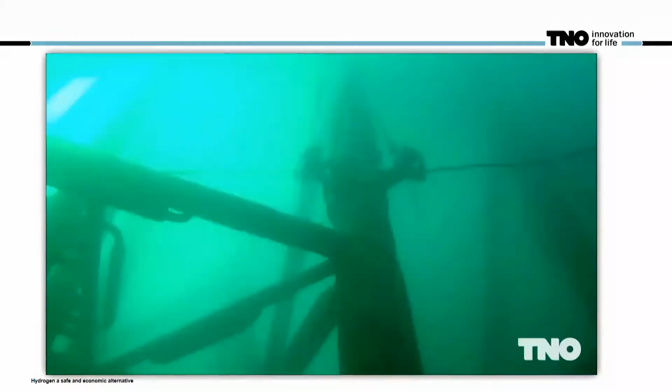Second project is about inspections. Underwater inspections are fairly complicated. They still have to be done. They require a lot of fuel. And so we developed a system with underwater drones. And one of the challenges underwater is communication. Why? Because Wi-Fi underwater, it simply doesn't work.

So we developed a system with sound. And with sound, we can do two things. We can communicate back and forth, and also we can determine the position of these drones. So as you can see on the video, they work together even.

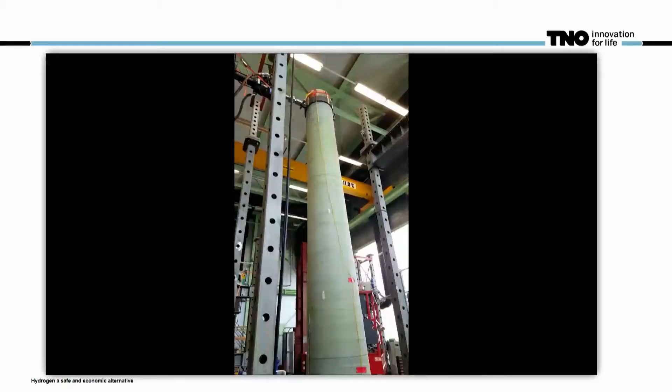But for instance, alternative material for ships. Ships are typically made out of steel. Can we make them out of composites? Maybe. But on the scale we have to do it to get it really feasible, those are still to be seen, but those are some of the challenges we will have.

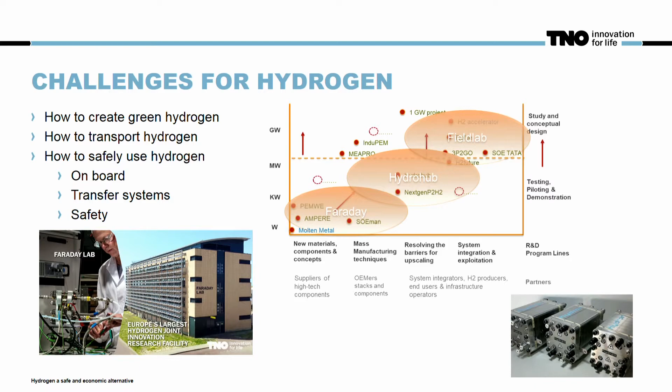Hydrogen. Hydrogen, actually, we can divide the challenges into 3 different areas. First of all, how do we make hydrogen? Right now, hydrogen is made out of natural gas. It's not green at all. But we would like to go to a green hydrogen. And then we have the challenges of, okay, how do we store hydrogen on board of ships? How do we transfer it? And how do we do this in a safe manner?

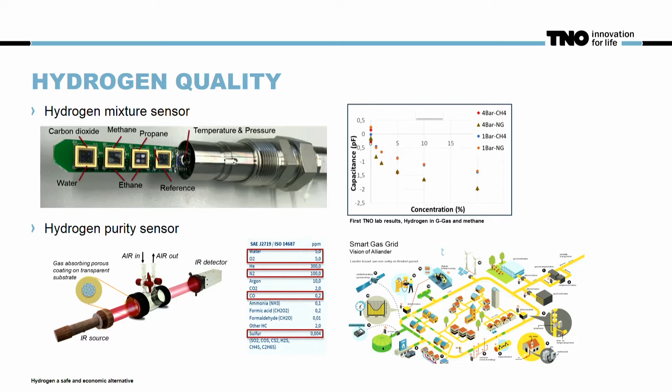Hydrogen quality. So the first one is big scale. This is small scale. How do we measure? Because everybody thinks hydrogen is hydrogen. No, it isn't. It's contaminated. So you have to measure it. How good is this hydrogen? So in order to be able to use it, for instance, for fuel cells. So there's a lot of things, big scale, small scale, to be done.

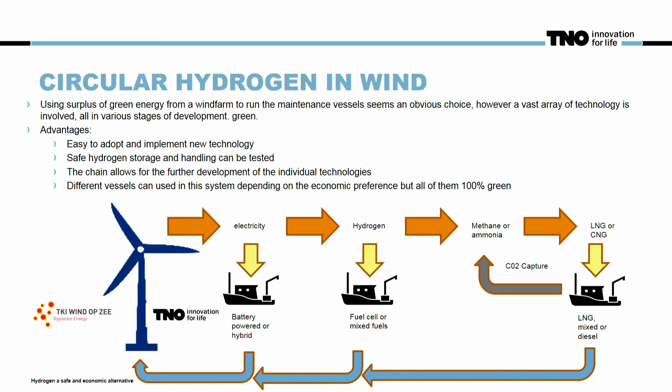Circular hydrogen. How do we make hydrogen out of wind energy? Because that's the only way to make it really environmentally friendly. Now, we can make synthetic fuels out of it. You can make methane out of it, ammonia, together with CO2 capture. A lot of possibilities, but still a lot of work has to be done here.

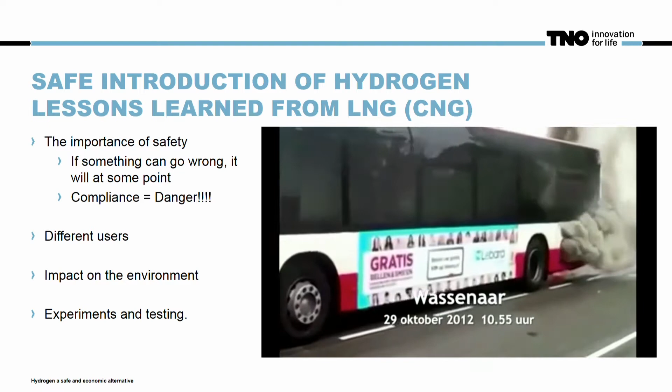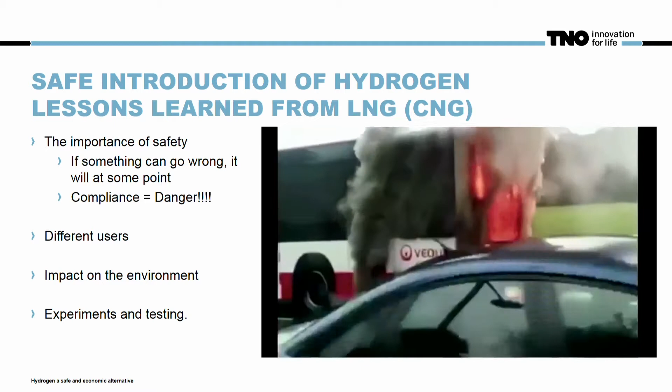And there are some lessons learned from the work on LNG we have done over the years. This movie actually is an accident which happened a few years ago in the Netherlands. It's a CNG bus. And we had a small fire on the bus. And this bus actually complied with all the regulations in the book. The manufacturer, everybody did it according to the book.

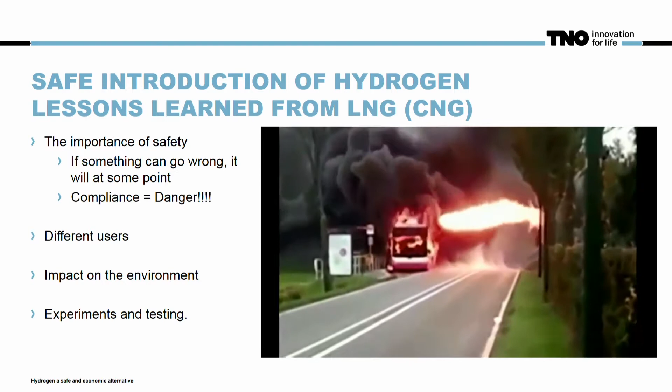And still, as you can see, something went really wrong. And we found out that the safety measures we thought were very good actually were not so good at all. Based on this accident, actually a lot of the regulations have been changed. And unfortunately, probably in the future, we will have to do that as well.

Hydrogen and LNG. We can learn a lot from these two different fuels. Traditional hydrogen was from a fixed place to a fixed place. So everybody thinks, what is the point? Why is it so difficult? But now we are switching to different use.

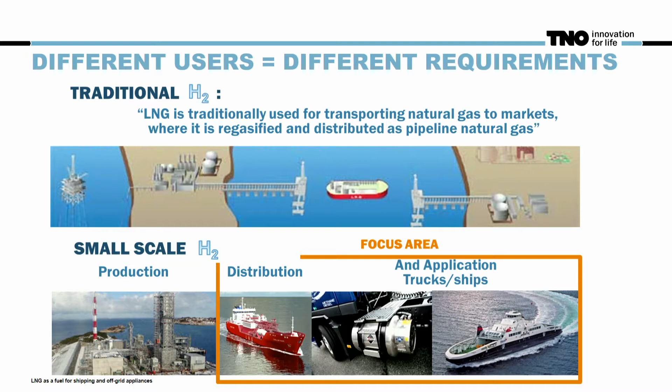Smaller productions, wind turbines, maybe local. Distribution is more difficult. We're going to use it on trucks. We're going to use it on ships. So usage is completely different. Instead of highly specialized people working with hydrogen, we now have people working locally with hydrogen, local fueling stations, which means different requirements and different ways of thinking about it.

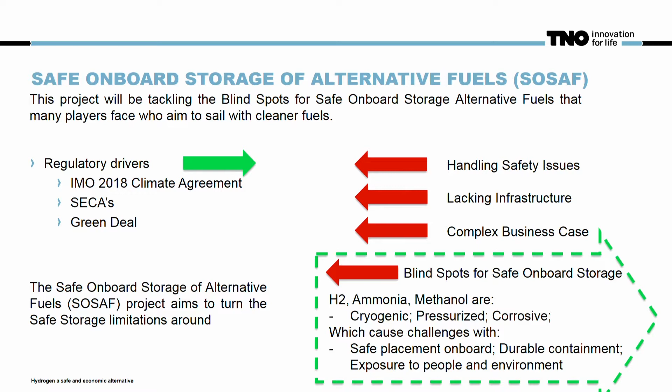We spoke about this one already. IMO regulations, safety issues, different infrastructure, complex business cases. These are all things to take into account. There is no one solution fits all. To make things worse, every ship has a different solution. It's a different usage. That also means in time there will be different solutions for different ships.

And unfortunately, we can already say, look, everything has to be green, everything has to be environmentally friendly, but let's face it, there are costs involved. And somebody has to pay for it. So it has to be economically friendly as well. So different solutions have a different price tag, CAPEX, OPEX, and that has to be taken into account. That means there will be a lot of new technology to be developed and to be introduced. Some of them will be retrofit, some of them will be new.

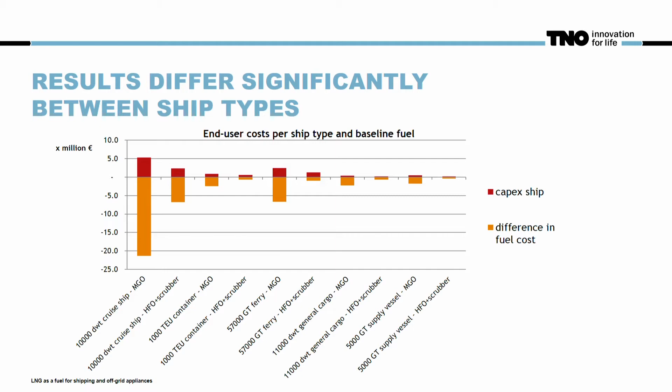And let's start with safety first. Everybody thinks safety is just one thing. The way we look at it at TNO is safety depends on, it can be small, big scale, and it can be high impact. And that depends on what kind of measurements you're going to take. So for instance, if it affects a big area, you will take measures much quicker.

Even with hydrogen, a small incident like in the beginning of this year in Korea has a very big impact on the reputation of hydrogen. A similar accident with LPG would never even have made the newspapers. So there is a very big difference in the scale of safety.

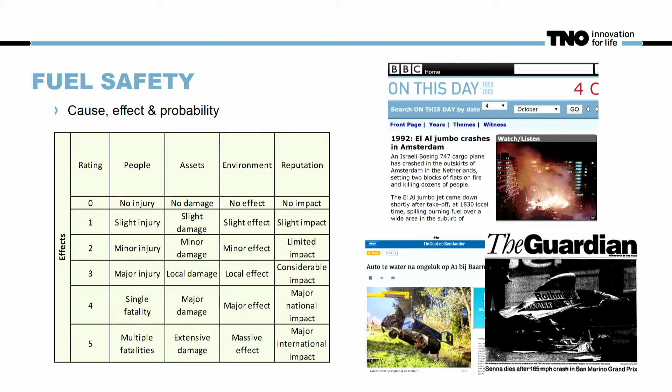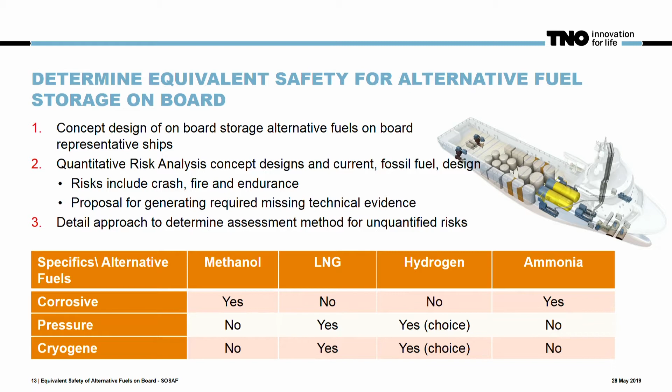Onboard storage. Everybody thinks this is good, this is easy. However, when we look at the different fuels, methanol, LNG, hydrogen, ammonia, we do want to use these fuels instead of heavy fuels or diesel. However, you need space for that, and also the storage conditions are different.

Typically, hydrogen and LNG, they're very similar. Either you talk about high pressure or low temperature. Methanol and ammonia are far more aggressive, difficult to handle, so your safety regulations or requirements are completely different, and different solutions for that.

The role of experimental validation and modeling. When we started with LNG, we suggested, let's run a truck over the hose. Everybody thought, you are crazy, this is never happening. In the meantime, we know better, because this will happen. We found out the hard way that, yes, when you run an LNG fueling station, it will happen at one moment in time. So better test for it.

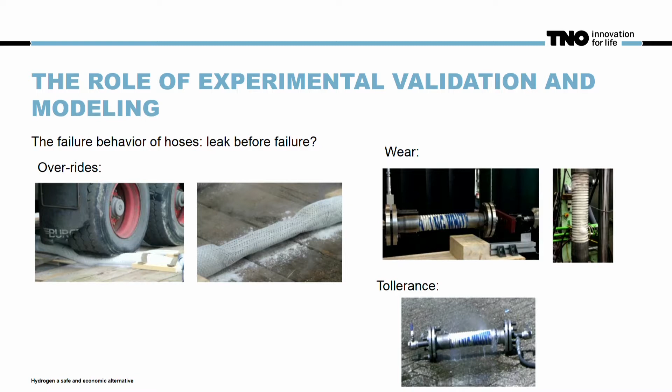The same we do with wear. The same we do with tolerances. So when you implement, let's say, a fueling station on a larger scale, these are the typical things we have to take into account.

Testing of materials, and that becomes more difficult. We talk about, especially for LNG, cryogenic temperatures, minus 160 degrees. Materials do behave completely different, especially when you want to move from steels to composites at that kind of temperature. It has to be investigated. There is not so much known yet about that.

When we go to hydrogen, it's minus 253. Again, different. Also, testing requirements are different. So a lot of material has to be tested.

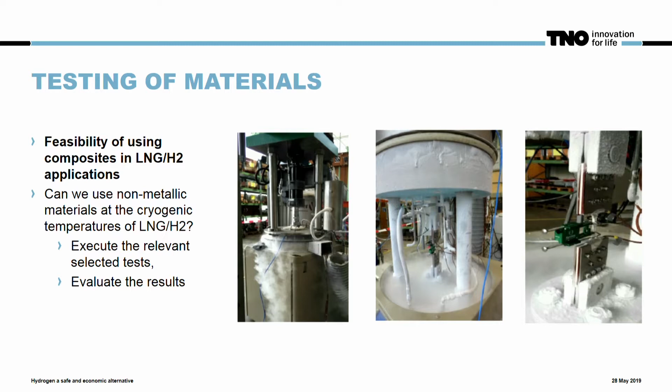And then we, of course, have the testing of the transfer system itself. Typically, these are examples from LNG. When we started with it, this was from a bunkering system to an LNG station. Always the same fixed ship to the same transfer system of the location.

Now we're going to expand that. We're going to use different ships, different locations, different requirements. We're going to do refueling at sea. So that means the usage of the materials and the systems are going to be different.

When you look at the requirements, they are not yet fully there. There's still a lot of discussion. Okay, we're going to test a new transfer system, but what conditions are we going to use? What are the standards? And are these standards correct?

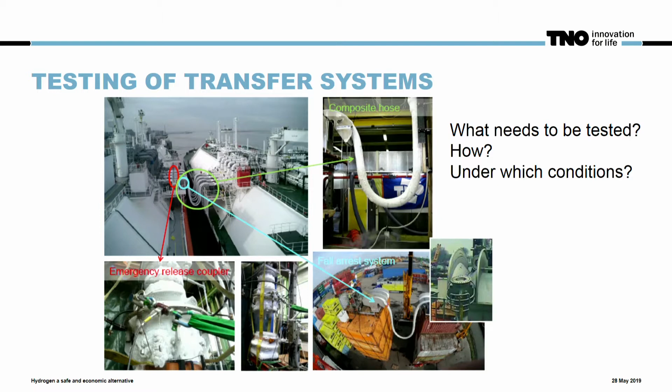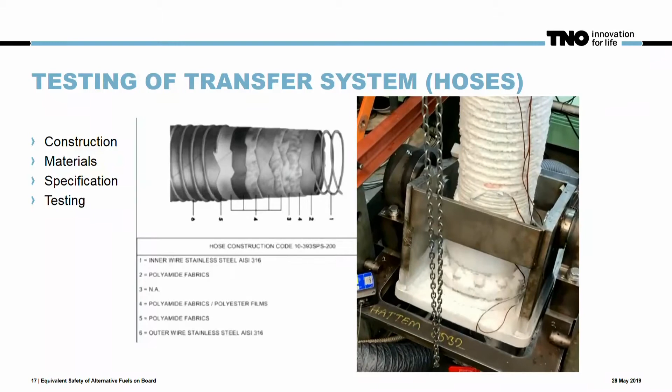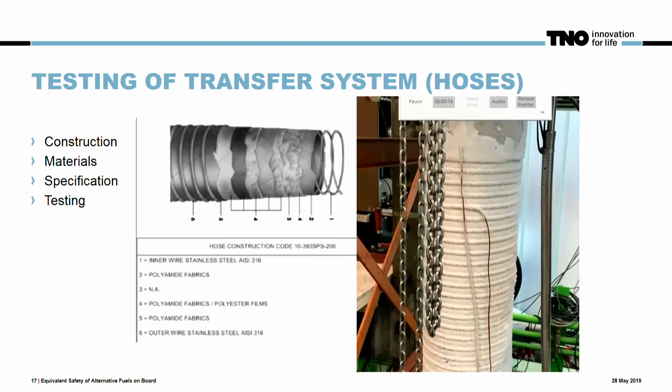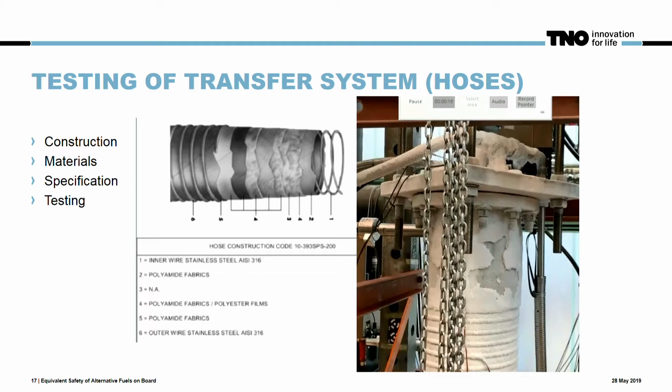Now, some of the examples we started with some time ago with a manufacturer. This was one of the first tests we did on one of the flexible hoses. And of course, the first ones failed. Because when you test these kind of things under cryogenic conditions, things are slightly different. On the drawing board, everything looks okay. When you start testing in real life, things do fail at places where you don't expect them, which is okay when you test things.

Testing of pipes and components. Everybody knows that, for instance, pipes and hoses are rated at a certain pressure. But what is the real pressure? When do they fail? And especially when it's at low temperature. You see here on the picture one of the burst tests we did with the hose at minus 160 degrees. It did cost us a high-speed camera because we did it in a bunker. But it gave us a lot of valuable information. Not so much what is the hose rated to, but when will it actually fail.

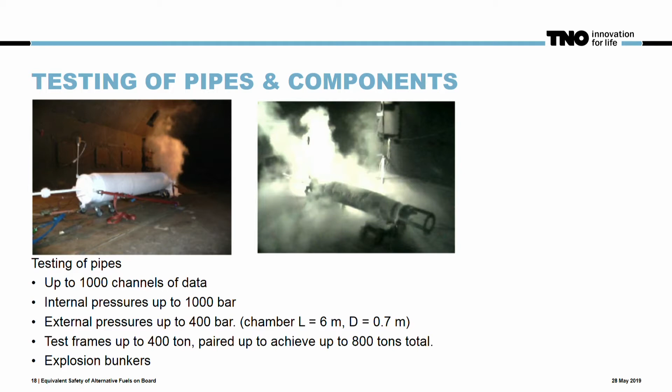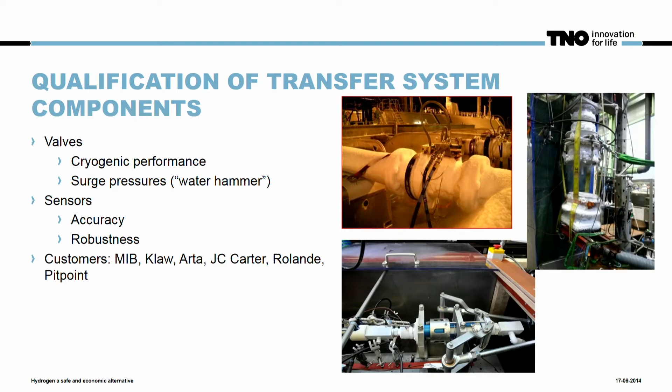Transfer system and components, you do want to have everything decoupled when it's needed. So also these smaller components, they have to work, have to be tested. And not just one time, also when these components are 10, 15, 20 years old, they still have to work. That also means that the testing requirements are different. There are different operating conditions, different lifetime.

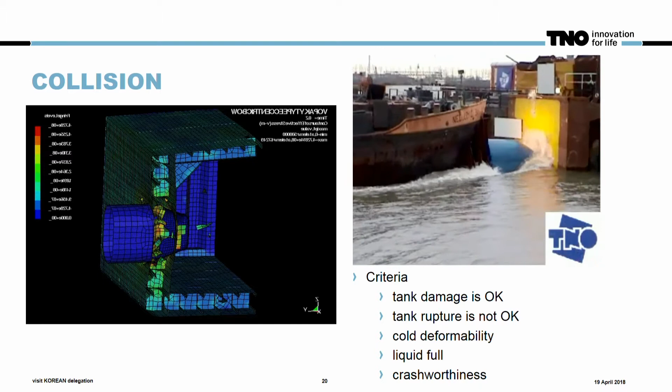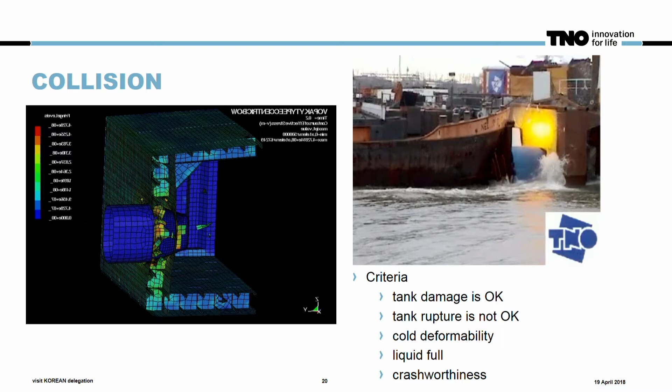And of course, we have to look at the ship itself. No, we do not do a crash test of a ship every day. But we use this information to do the calculations and to check if the calculations are correct. And that gives us a lot of valuable information. In this particular case, we looked at rupture. If the tank is damaged, that's okay, but it should not rupture, it should not break. And of course, we have to do that at low temperature, different levels of liquid, so we look at crashworthiness.

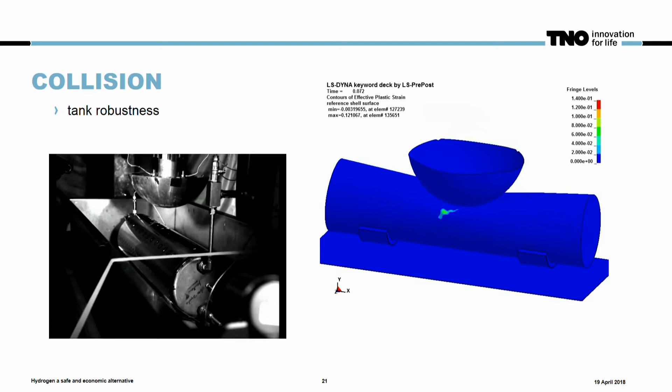This is actually an example. If we would put a tank either on board of a ship or on top of a ship, you do want to know, okay, if something drops on the ship, what will happen? Are my calculations correct? You can see on the picture as the stamp is coming down, the hydrogen, in this case it's actually nitrogen because that's the way we tested it, is coming out. So there's a blow-off valve.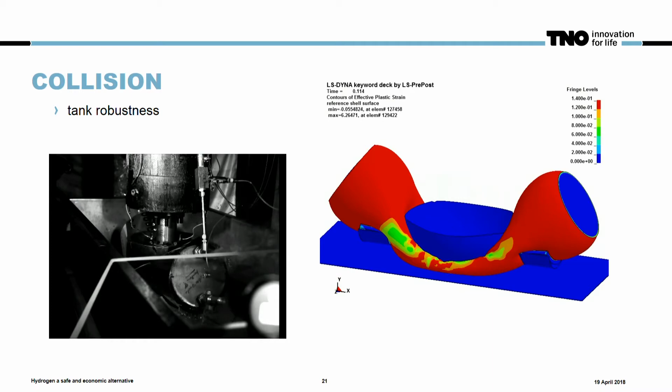So we find out by the calculations, these tanks, even if they are so much deformed, they don't crack. They are heavily damaged, but they stay in one piece. And that means your safety requirements can be done completely different. And you can meet all the safety requirements.

You don't want to do a tensile test at minus 250 degrees surrounded by hydrogen in an office somewhere in the center of Busan, because that's not possible. It's too dangerous. So we're also looking at different ways of testing. One of the things we do want to test, and actually that's why I put a sample of a tank up here, is, for instance, the combination of steel and carbon, steel and composite, because that's probably the future for the tanks. But also over there, a lot of work still has to be done.

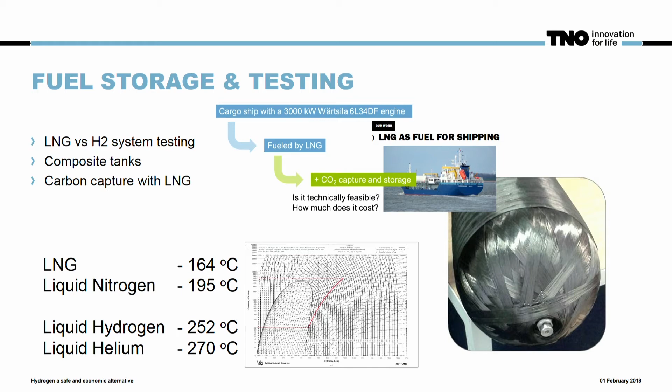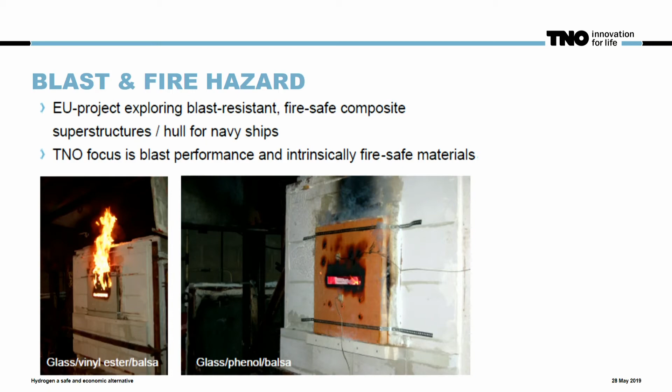We used to do tests for the hull of Navy ships, because if there is an explosion on board of a ship, you don't want the ship to sink, because then you have a lot more difficulties. So it's all about safety and new materials, testing of materials.

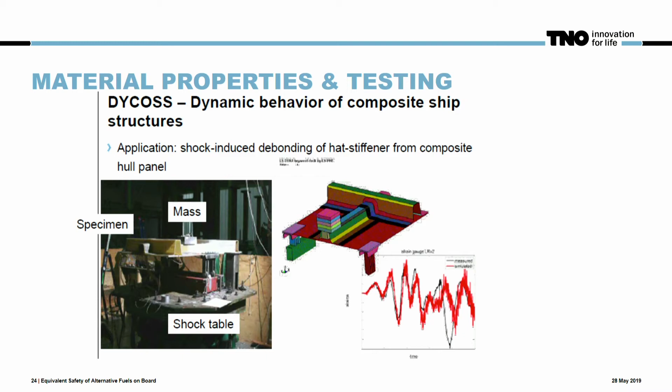Using composites actually brings another challenge, and that is shock. Of steel, we know pretty much how it behaves under shock conditions, when there is an explosion or an accident. With composites, we do not know that much yet. So this is an example where we put a high shock on a composite to see how it behaves. Is it good enough, or do we need different regulations?

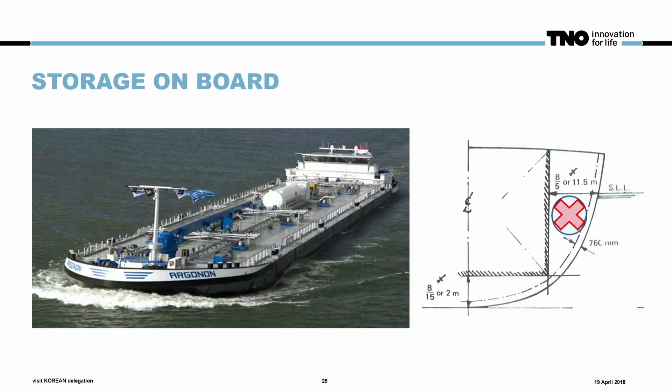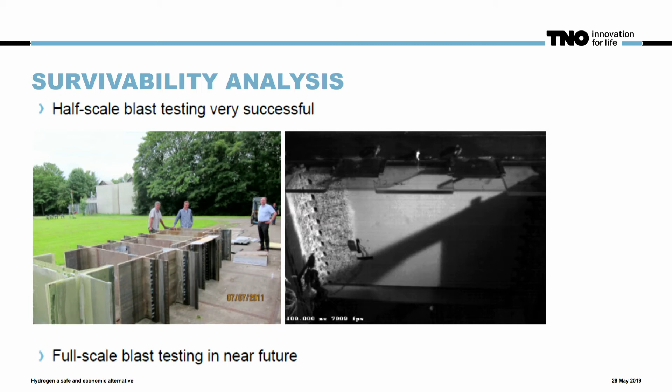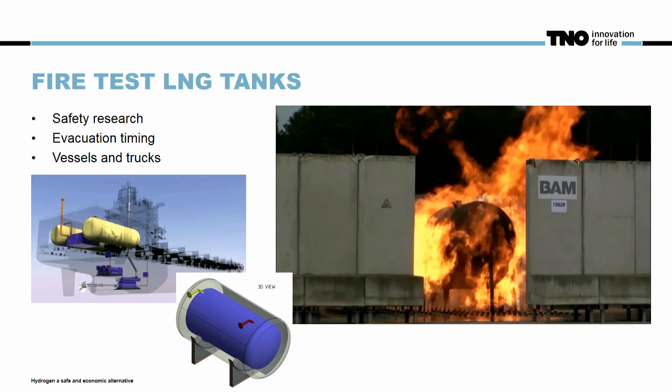The first one, we said, let's use a blow-off valve so that when the temperature increases, the gas can go out safely. And as you can see in this video, nothing happened. We continued for 1.5 hours, still it was safe. So what did we learn? For the safety of the firemen, it was very easy. They have at least 1.5 hours to go on board of a ship, do the evacuation, or evacuate the surroundings to make sure everybody is safe.

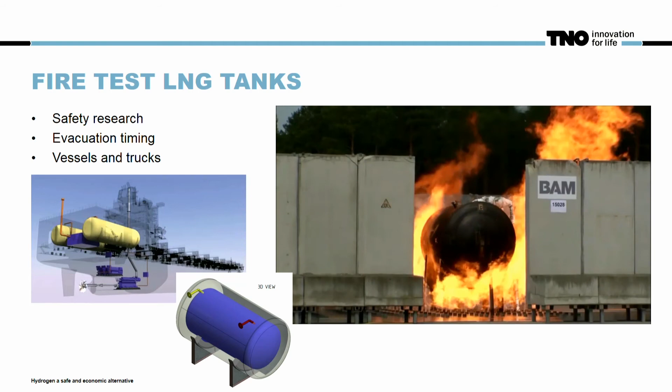We repeated this test twice, one with the blow-off valve closed, and it was still okay. And the third time, we put the tank in the water after, I think, 1 hour. And then it did explode. So that means if a ship is sinking, it does become very dangerous. That gives very valuable information for the firemen: we know 1.5 hours is safe, and when the ship is sinking, better get the hell out of there.

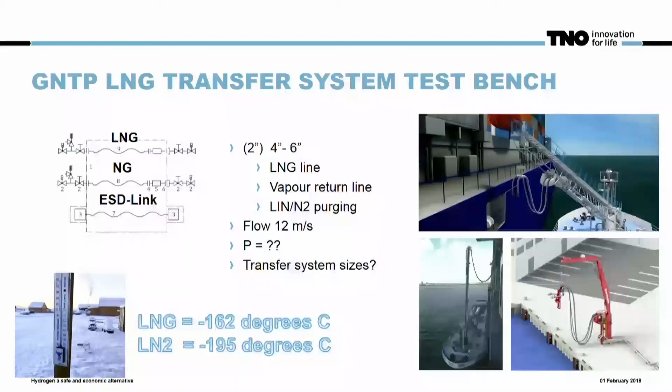We can work alone, but we have to work together, because there are a lot of things to explore: new challenges, new technology, new opportunities, and also a new environment every once in a while. So we are actively looking for new partners, new people who want to make this world better, look at new fuels and new possibilities, and make the maritime industry successful, as a lot of the speakers today would also like to do. So let's work together and see what we can do to make these fuels very safe on board of a ship.